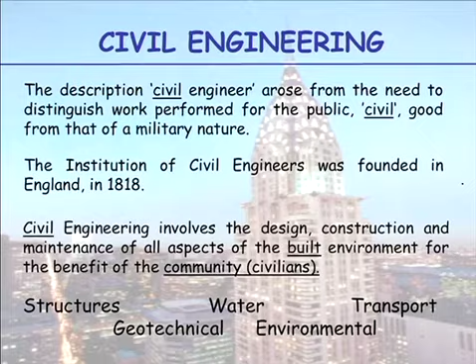So civil engineering itself involves design, construction and maintenance of all aspects of the built environment, not just the environment, for the benefit of the community. So at Monash there are 5 different branches within civil you can look at: structures, geotechnical, water, environmental, transport. So just briefly what they're all about. The pictures really are self-explanatory. So you can come and do civil and not be clear what field you want to concentrate on.

So you could end up being a transport engineer where you're looking at highway traffic design, traffic patterns, road networks, rail networks, ports, airports. You could become a water engineer or look at hydraulics and hydrology where you look at storm management. That's been a very popular branch in the last few years, with the drought occurring and people having to come up with very efficient ways of finding energy and water and using water, minimising the water use. So you look at stormwater management and also water quality, looking at canals and pipelines and river and stream management,

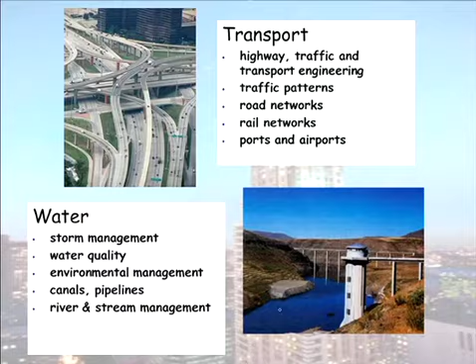the environmental aspect. Geotechnics has to do with everything underground, okay? So foundations, embankments, tunnels, environmental, geomechanics, mining. So there's now a mining degree here I think you can undertake as well. So when we build multi-storey buildings, generally the structural engineers will stop at the ground and then they'll hand the lower part of the building across to more experienced engineers, geotechnical engineers, if it is something like a multi-storey building where proper calculations have to be made.

And finally, my favourite, structural engineers. I like structural engineering the best because it's what we see around us. So structural engineers, of course, are involved in buildings, bridges, industrial structures, and repair and assessment. There's a lot going on now with retrofitting, improving existing infrastructure rather than pulling it down and rebuilding. So in this subject, we concentrate purely on structural engineering. So we're not going to be looking at the other branches of geotechnical, transport and water, just structural engineering.

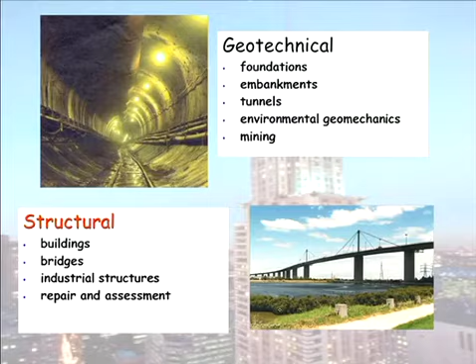So what is a good structural engineer? A good structural engineer will create an aesthetically pleasing... I left out of here, sorry, environmental engineers as well, which of course are concerned with protecting the environment by assessing the impact a project has on the air and water quality, soil and noise levels. Okay? So a good structural engineer will create an aesthetically pleasing structure which will not fail in the most economical way. So to be a structural engineer, you cannot just be good at maths, okay? You have to have quantitative, qualitative skills and management skills.

So the qualitative skills I'm talking about here is you have to actually be creative. That is if you want to be a good structural engineer, of course. Engineers can have a very bad reputation for wearing grey suits and effectively telling architects, no, you can't do that, you can't do that, no, you can't do that. So we want to breed a better quality engineer here where you're open-minded. So you need to be creative, open-minded. Remember, there's always a solution to a problem. It may cost more, but you should always be open-minded enough to find a solution. You need to be flexible.

Now, I can't really teach you those things. Well, in this course, I'm not teaching those things. In this course, we're going to look at quantitative ability. So this, of course, is an understanding of maths and science. So I'm going to teach you about the way we design. And then there's, of course, management skills, which is more to do with leadership and planning and, of course, communication. And you will experience some of this when you are working in your project groups. You'll be working with people you've never met before, and you'll be delegating different tasks to different people. There isn't that much room to be creative in the projects we have, I'm afraid. But you can be creative in other ways.

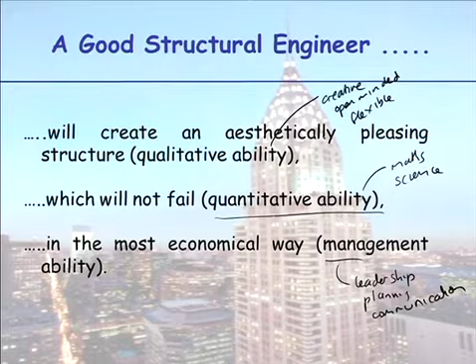Now, when I give these lectures, I know they can be a bit dry, and 2 hours is a long time. So what I do is I usually will have a break in the middle of a 2-hour lecture.

What I do tend to do is put in what I think are interesting things. I just tell you about a structure I like, a structure I've seen and took a photo of. So it's not necessarily a current structure, it's just a structure I think is a little bit interesting that I'd like to tell you a little bit about. And hopefully by telling you about these structures, it will inspire you to become a structural engineer.

Okay. It is 20 metres tall and has a wingspan of 54 metres. So that's greater than a Boeing 757. So it's a big structure. You can see people down here below. So it's a very, very big structure. It weighs about 200 tonne.

And something I want you to start getting familiar with is what weights are, what weights mean. So when I say 200 tonne, I want you to think that 1 tonne is about the equivalent of a small car. So this structure weighs as much as about 200 cars, and that way you can relate to the loading a bit better. So it's pretty big and heavy.

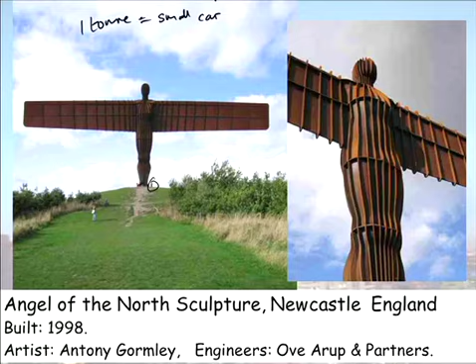It's Britain's largest sculpture, and it has a very complex construction which required complex finite element computer modelling. It has an internal skeleton made from 30mm thick steel. Out here the ribs and the plate are made out of 50mm and 6mm steel. So just to get that in the shapes required a lot of work.

So the key to success here was the relationship between the sculptor or the artist and the engineer. The artist said what they wanted, and the engineer made sure the artist could get the result they wanted. How would you design a structure like this? What's the design load here? The critical design load here is, of course, wind loading.

This structure is up on a hill. It's in between 2 motorways, and it has to withstand winds of 160 kilometres per hour. So there's a lot of overturning moments acting on this. As well as the structure you see above ground, there is an equal depth structure underground that you can't see that makes this thing stand up.

Underground, the foundations comprise 700 tonne of concrete, so there's more weight underground, and 32 tonne of reinforcing steel. So they basically had to pile down until they hit bedrock in order to keep this thing up.

The steel it's made out of is called Corten steel, so it's not rusting by chance, it's rusting on purpose. Corten steel has, I forgot, a higher or lower carbon content, something, but basically it forms this rusty skin and then stops, so that the rest of the steel does not rust. Okay, and that's the Angel of the North.

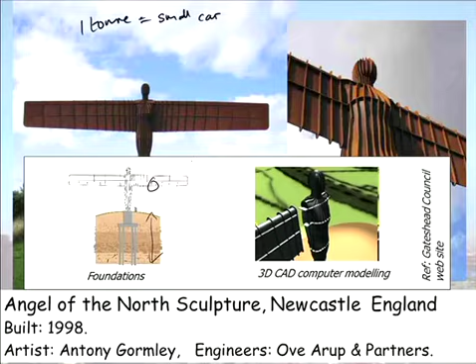And as I always say at the end of one of my, I'll call them interesting facts, if you want to design something like that, you have to know how to do the next thing, which is the really boring maths part of it. But anyway.

Okay, so moving on, phases of a structural engineering project. So how does a job like that sculpture work? Well, first of all, you get a client request. The client rings up, sits down with either an architect or an engineer, and says what they want. So they get a listing of the detailed requirements of the project. And then next comes the concept design.

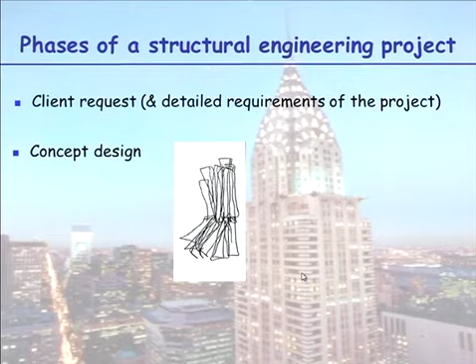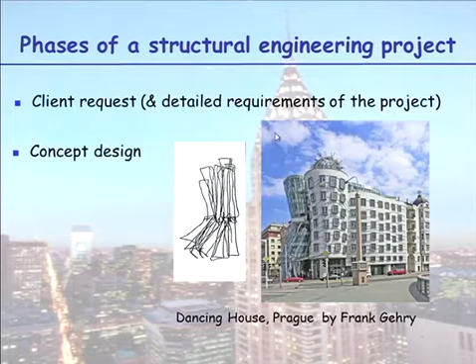Okay, that was the initial concept design by a very famous architect called Frank Gehry. And this is the building in Prague. It's called the Dancing House. So here is a concept design, and here is the building in its built form.

So as I said, if you want to work on exciting, interesting projects, you have to be open to everything, and creative and a bit appreciative. I love that bit of sketch there and seeing that building next to it. I think it's wonderful. Anyway, in this course we're not going to be looking too much at concept design, but you should be aware of it.

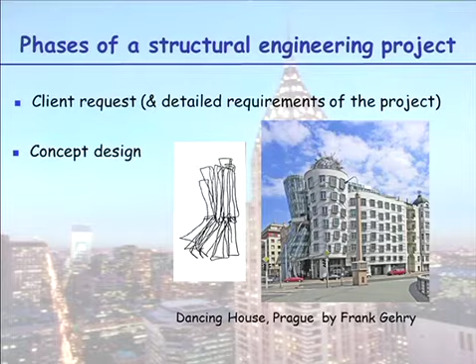The next stage to follow concept design is the detail design. So this is the number crunching, and this is where this subject focuses.

So you now have a concept design: how many stories your building has to be, whether they want steel or concrete, how big is the block, how big is everything. And then we can start doing, this is when engineers come into their own, we start doing our load calculations.

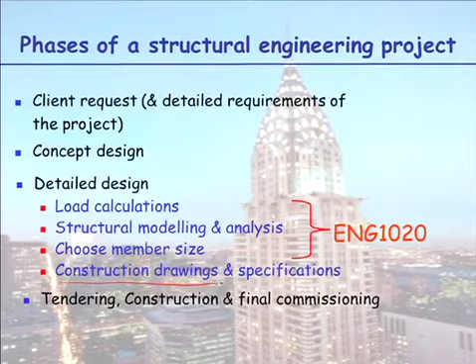So what is structural analysis? This is what I will be teaching you about. Structural analysis allows us to design, before building or manufacturing, an efficient, economical and functional end product. How do we do it? We use maths, lucky because we're all good at maths, that's why we're in here. We use mathematical models of loads and structures, and we predict stresses and deformations and therefore whether failure will occur. So we come up with a mathematical model of reality.

Very often computers will be used, 99% of the time computers will be used to perform the computations. But that is not to say you don't need to understand or know how to do anything by hand anymore. The problem is garbage in, garbage out. You have to understand how structures work, so you understand if the input you put in is correct or wrong in any way. Quite often in higher years, 2nd, 3rd, 4th year, students say, oh, my computer output's not right. Well, that's because you entered something in incorrectly.

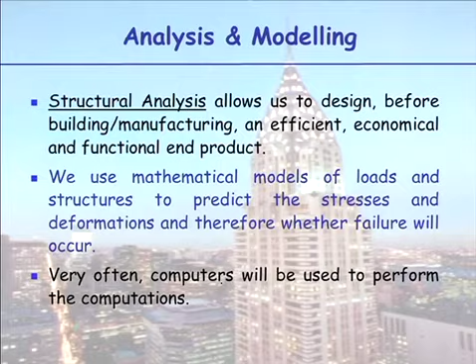Well, what did I enter in incorrectly? Well, you should be able to work that out. So it's still just as significant, just as important, that you understand the basics of engineering, even though computers will do all the grunt work for you. You understand the maths behind it. So these structural models, you can actually design a lot by hand, you don't need computers to do your bog standard buildings. That can all be done by hand as it was in the past.

So a lot of structures, your standard square, rectangular buildings, many structures actually comprise a makeup of 2-dimensional structures of beams and trusses, and we can model them in 2 dimensions. So here is a typical 2-dimension model where we represent our beam members and column members as sticks. These are beam members, horizontal members; vertical members we call columns. The joint point, how we join them at a joint point, and down the base we have our supports, and I will talk to you about different support types and different ways to join our members.

Because you can join them with just a pin, a hinge connection, or you can have rigid jointing, and that variation is significant in the way a structure will work, whether joints are simple hinge joints or fixed joints.

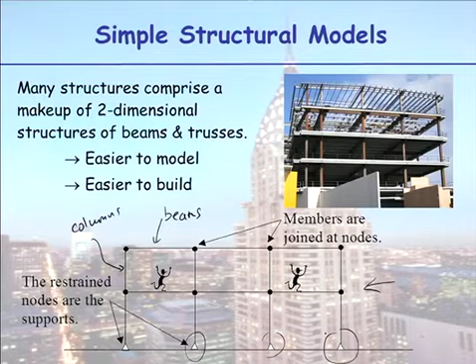So by working in 2D, we're not just making life easy for us to model, but it's a lot easier to build. If you have a repeating rectangular grid, builders will make fewer errors, they'll build it more efficiently and more economically. And that's what it's about at the end of the day, keeping structure costs low. For a majority of your bog standard structures, you want a cheap structure.

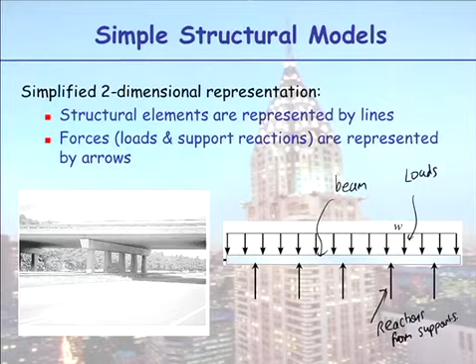So what we do is we create stick models, we estimate and work out how much the structure weighs, put that as a load on top. We estimate car traffic load in this case, put that on top as a load, and then we go ahead and start analysing the structures.

Of course, there are many structures that cannot be turned into simple 2 dimensions. Structures comprising complex 3-dimensional forms with complicated loading and material properties usually require computer analysis. So here on the left we have soil, and because soil is a non-linear material, the actual material properties would be put into the analysis, and that would be done by a computer.

Over to the right we have a storage bin. It's a 3D structure, so the easiest thing is to actually model the entire thing and then put the loading on there. So when we do so, our elements here are generally not just lines or single elements - they are represented by either solid bricks, plates or shells.

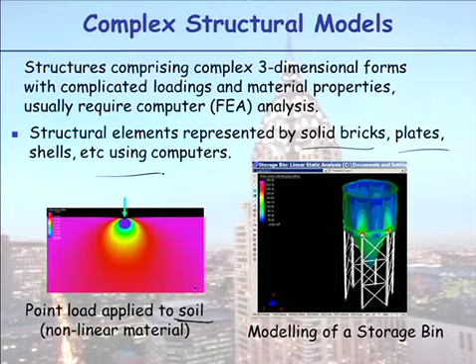We won't be doing any of that in first year. Finite elements is left as a 4th year subject to do. Okay, how are we going for time?

Okay, let's just break across quickly to sustainability. Sustainability is, of course, very important. Is this your first lecture? Have you been given these sustainability slides yet? No? Good, I'm the first one. Okay, sustainability, very important at Monash.

Most subjects you do in engineering will have a sustainability component to them. Very important in today's environment where we're not doing the world much good living in it. So sustainable development is development that meets the needs of the present without compromising the ability of future generations to meet their own needs. That's the commonly cited definition.

If you look in Moodle, for all your subjects, you should see a tab, a Moodle site called Sustainability. In that site you will find bucket loads of information that you can use as a guide to other subjects, and when we look at sustainability in more detail in this subject. I'll give you a 1-hour lecture on passive design in this subject, but otherwise we don't do a lot about sustainability because I'm just teaching you the basic engineering structures that you need to know.

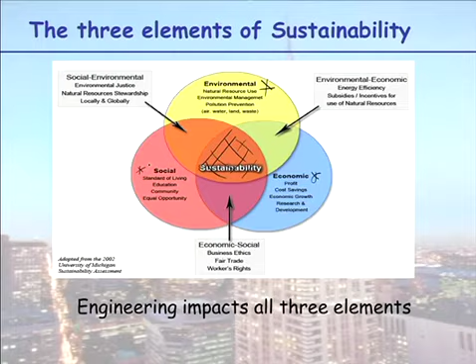So some of you may be doing environmental engineering or environmental subjects, and you'll be learning more about it then. Why am I telling you about sustainability? Because engineering impacts on all three elements, of course.

So engineers, as part of design, we need to consider how to reduce the resources used, how to reduce energy use, how to reduce waste produced, how to improve profitability - because we may have a wonderful structure, but if it's too expensive, no one will build it - and how to improve human use comfort.

I'll be talking to you about passive design, which is really about going back to how things were done years ago. Do you need an aircon? If you get your windows aligned properly in your house and you can get good natural ventilation in, you may need aircon, but maybe only for half the days of the year, because you can naturally ventilate your home.

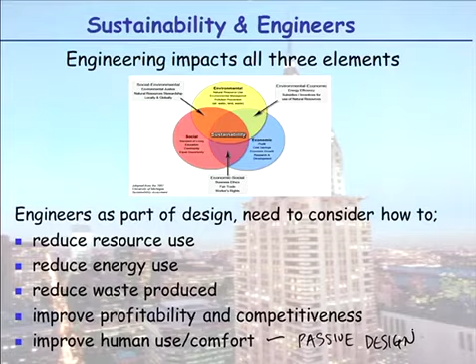By siting your building so the communal area has a north-facing aspect, you can actually, in winter time, heat up your house without turning the heating on at all. So there's a lot we can look at, a lot of ways we can improve human comfort with reduced cost and less impact to the environment by looking at passive design. I'll be talking to you about that later.

So we know we have lots of sustainability problems. We have climate change, whether you're a believer or not, you should all know about it. We know we're eroding soil, air quality, the problems going on right now down in Gippsland are pretty horrific. Ozone depletion, skin cancer is very important. Resources used, water quality, we've just been through a drought. These are all problems we have to deal with, and they all involve engineers.

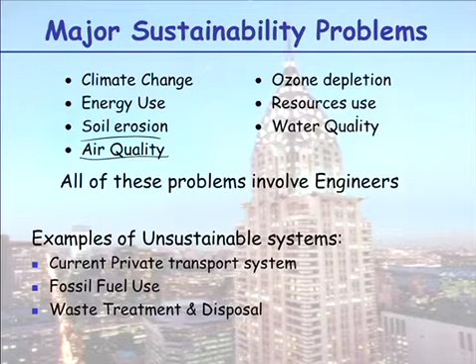Examples of unsustainable systems: the private transport system. How many of you drove here today? How many of you could have caught public transport but drove? If there are ways of improving public transport, maybe more people will go that way. Fossil fuel use, we have to move away from coal more. Why aren't we putting more panels on the roof? Costs too much. So it's very important that you can weigh up the environmental, social, and economic cost here. And, of course, waste treatment and disposal.

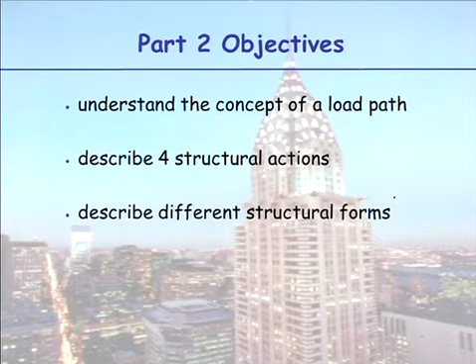Okay, part 2 now—we'll start today, continue and finish off on Wednesday. The objective is to understand the concept of a load path, to describe four structural actions, and to describe different structural forms. So, what is a load path? It's a route along which the applied loads are transferred to the support.

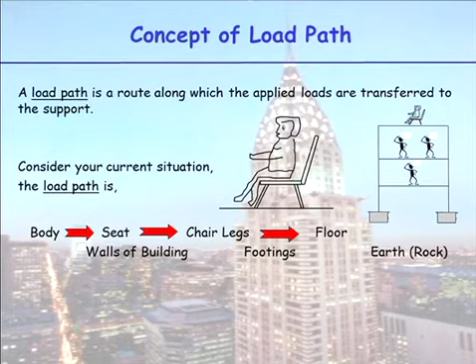In your current situation sitting here, the load path, the weight of your body, passes into the seat. There are no chair legs here, but the weight is transferred through the nuts and bolts into the building. Assume you're sitting on a chair with legs; it goes into the floor, then from the floor into the walls of the building, then into the footings, and then into the earth, into the ground. So an engineer's main responsibility is to ensure that no failure occurs along the load path.

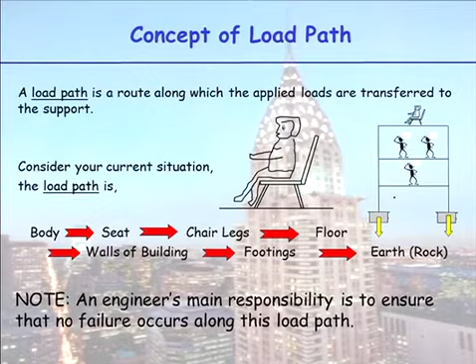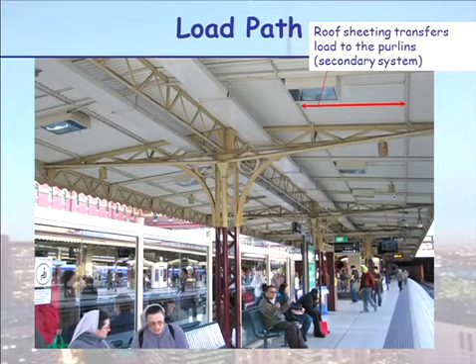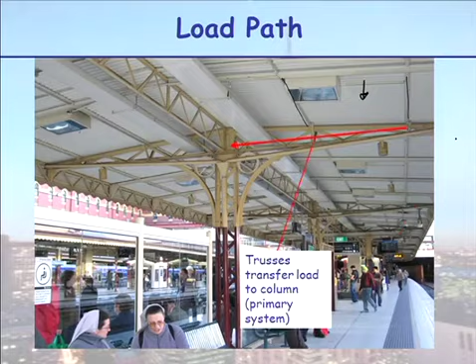So here we have our wonderful Flinders Street station. The load path here when you're looking at the roof structure - if we had a bird or someone walking up here on the roof, what's the load path? Say the person is standing above this point. The roof sheeting would transfer the loads to our purlin members, these secondary members called purlins. These secondary purlin members then transfer the load into our primary truss, and then from the truss, transfers down to the column and into the ground. So there's the load path there - we don't need arrows to explain it, just a continuous path to follow.

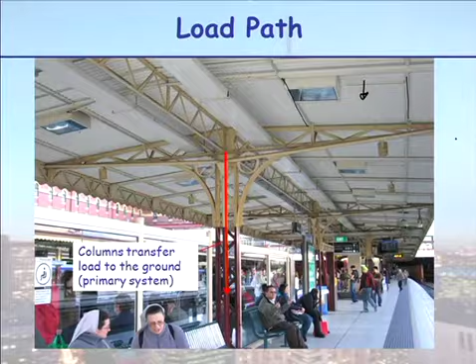So that's what a load path is. And when you do your practice week, you'll be asked to use the concept of a load path to explain in a case study why one structure failed, killing 114 people.

Now, the process of load transfer involves structural actions. So now we're going to learn a bit of engineering terminology, of which there are four. Axial tension and compression, that's pretty well understood by the layperson.

You squash something - you are compressing the seats, the padding on your seats at the moment. The other way, when you stretch something, when you hang from a rope, the structural action is tension. Most structures don't transfer load by the structural actions of compression and tension.

They do so by the structural action of bending. So beams bend. When you walk across a plank or a bridge of any form, the bridge is bending. And there we have a fishing line - the load is pulling down. So you could say our rope here is in tension, has a structural action of tension in it, but our fishing rod itself is bending.

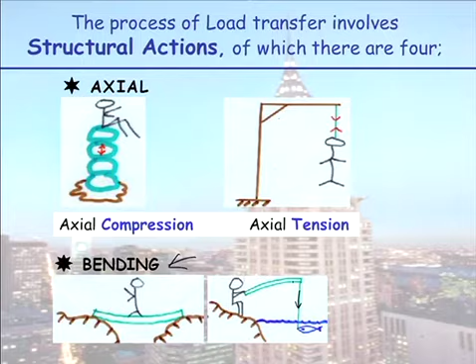The third structural action is shear, which is very hard to actually see, but shear causes distortion. Shear is the internal action trying to slide one part of a beam over another, and it causes distortion.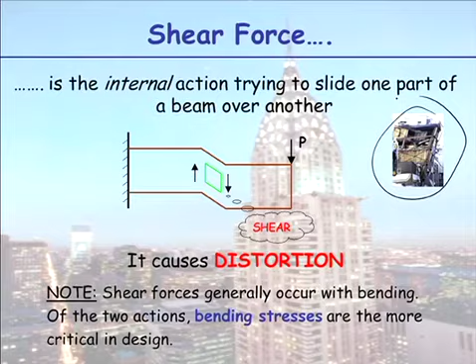So shear forces generally occur with bending. They go hand in hand with bending, and of the two actions, bending stresses are the more critical. We're going to do quite a bit of work on bending stresses, less on shear in first year.

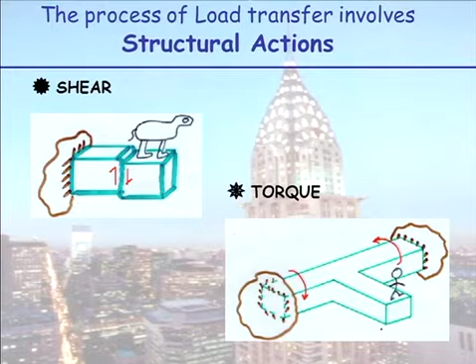The third - fourth - structural action is torque, and I didn't bring my ruler, but I just want to mention the difference between bending and torque. I think in physics, all bending you refer to as torque, okay? Torque is the twisting, it creates twisting, and it's bending about the longitudinal axis of a member. I should have brought - you'll see me bringing in flexible rulers and bits of foam to try and show you how things move. So torque is the fourth structural action which causes twisting.

So here's the deformation mode form for each structural action. In compression, something squashes or shortens. In tension, it stretches. When something is experiencing bending, it curves. In shear, maybe not so obvious, but shear causes distortion, and torque causes twisting. So please stop talking about bending and referring to it as torque now - if something is curving, we say it is bending.

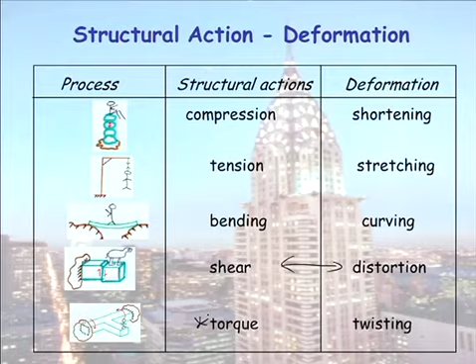So common structural forms around us are made up of arches, beams, trusses and cables in the two-dimensional forms, and the three-dimensional equivalent - shells and domes are what an arch would be called in 3D. Beams, we have slabs in 3 dimensions. Trusses, we have space frames, and cables become membrane structures.

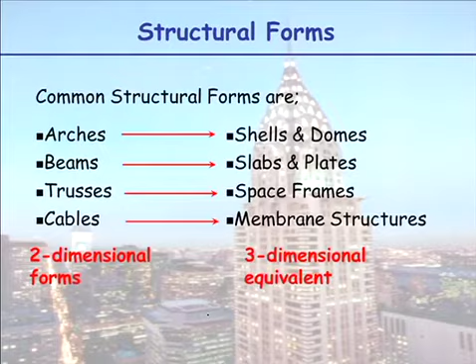So these structural forms can be defined by their structural actions: tension, compression, bending, shear, torque. Arches experience compressive forces in them. Beams, well, we know beams bend, so they experience bending and shear. Trusses, when you actually look at the individual truss members, they transfer load by tension and compression through axial forces. And cable structures transfer load just by tension - think of it as a bit of rope, you can't squash it, you can't compress it.

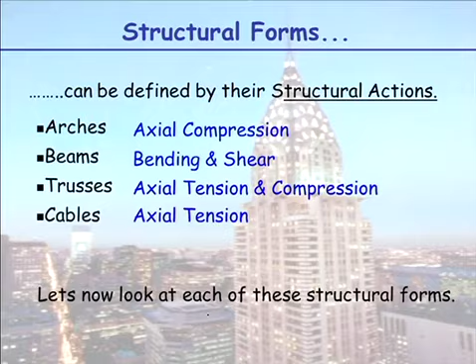So I will now look at each of these structural forms in more detail.

Starting with arches, not so many arches are built today, but lots of arches were built as far back as Mesopotamian times, 2000 BC. Why were there a lot of arches built then? Because the building material they used was whatever they had around, and they had a lot of brickwork and stonework, and because arches transfer load through compression, stone and mortar and brickwork can transfer that easily.

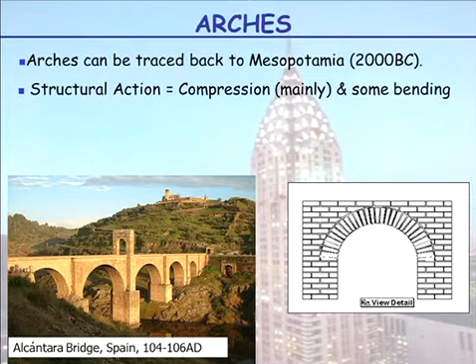So the structural action is compression with a bit of bending. Our vertical applied loads are turned into radial compression forces, which are then reacted by the supports. Everyone's heard of the centre stone being the keystone, but it actually does not perform any different action than all the other members in an arch.

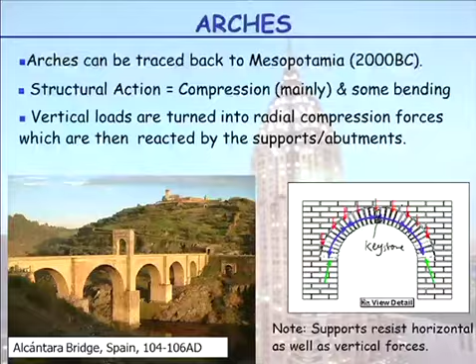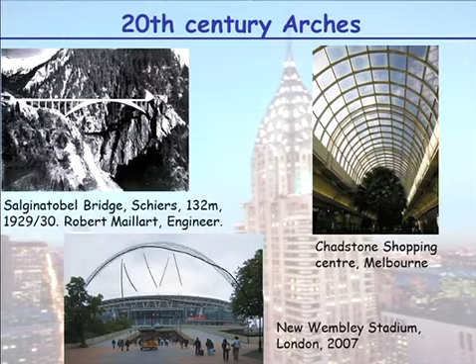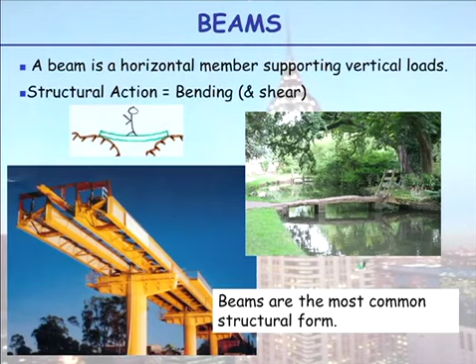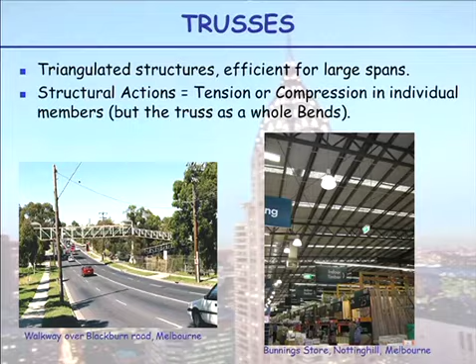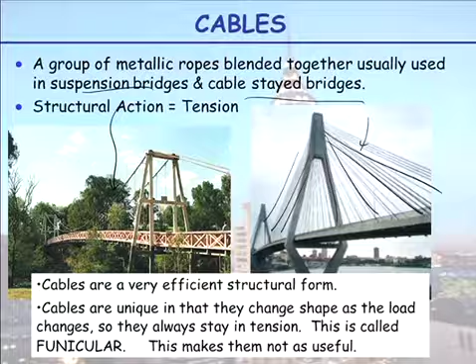So you can't have just a bit of cable to support a road, because the road will move around too much. That's why we have cables up top, and then we have a stiffer deck below being picked up. Okay, we'll stop there.